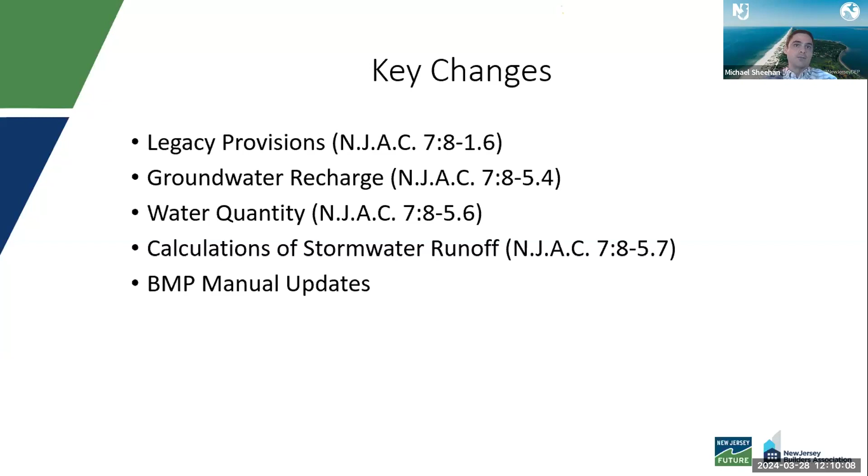Some of the key changes are listed here. We have the legacy provisions, how projects will be subject to one rule set or another. From the stormwater management end, we have the groundwater recharge standards, water quantity, and how we calculate stormwater runoff. And all of those changes required us to make some updates to our BMP manual. So next slide, please.

So going through them, the legacy provisions is really the best place to start because you need to know what rule set you're going to be subject to. So all major developments are subject to the new rules, except in certain circumstances. If no permits were required from NJDEP and an application was required by ordinance to, say, a municipality or a county review agency, and that application was submitted prior to the adoption of the rules, it would be legacied, as we call it now.

Or if you made an application to the NJDEP and it was technically complete prior to the adoption of the rules, you would then be legacied, provided that application had a stormwater management review component. We do have something like the Freshwater Wetlands Protection Act rules, which under general permits, we only look at stormwater if the major development thresholds are triggered within the regulated areas. So we had to make that distinction.

It's important to note that we kind of have two tiers of legacy. If the application was made between March 2nd of 2021, which was the effective date of the green infrastructure rules, and July 16th of 2023, you would then be subject to the green infrastructure rules. And if it was made prior to March 2nd, 2021, you would then be subject to what we refer to as the old stormwater rules prior to the green infrastructure revisions.

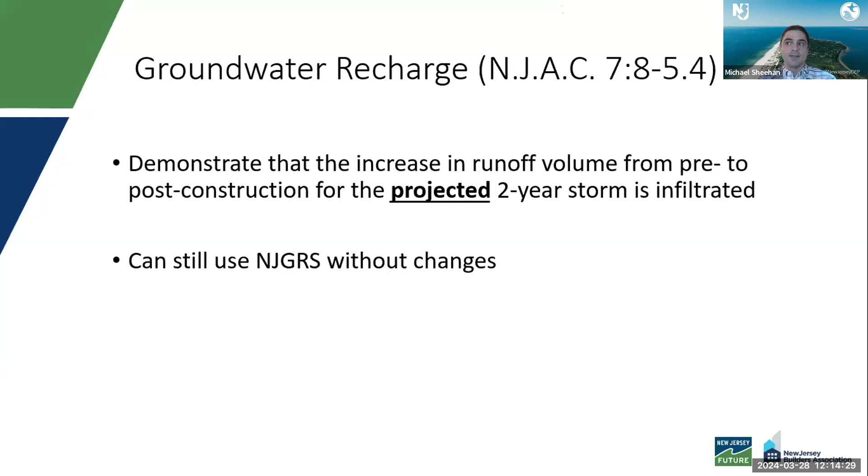Moving on to groundwater recharge, not too much has changed. Instead of demonstrating that the increase in runoff volume from pre to post construction for the 2-year storm is infiltrated, we're now looking at the projected 2-year storm. And we'll talk a little bit about what this projected 2-year storm looks like. But otherwise, the vast majority of projects that we see use the New Jersey groundwater recharge spreadsheet, and that can still be used without any changes. Next slide, please.

Water quantity is where the biggest change occurred, at least practically. In terms of rule text, not much has changed. Water quantity reductions must be met now for a total of 6 rainfall conditions. So you're going to have your current and projected 2, 10, and 100-year rainfall events. So it's important to note that the quantity standards aren't changing, just which events we're looking at.

So the quantity standards are matching or reducing proposed hydrographs compared to existing, demonstrating that there's no increase in runoff rate, and that the increase in runoff volume or change in timing doesn't make flooding worse. Or what we see most often is your peak rate reductions of 50, 75, and 80% for the 2, 10, and 100-year events.

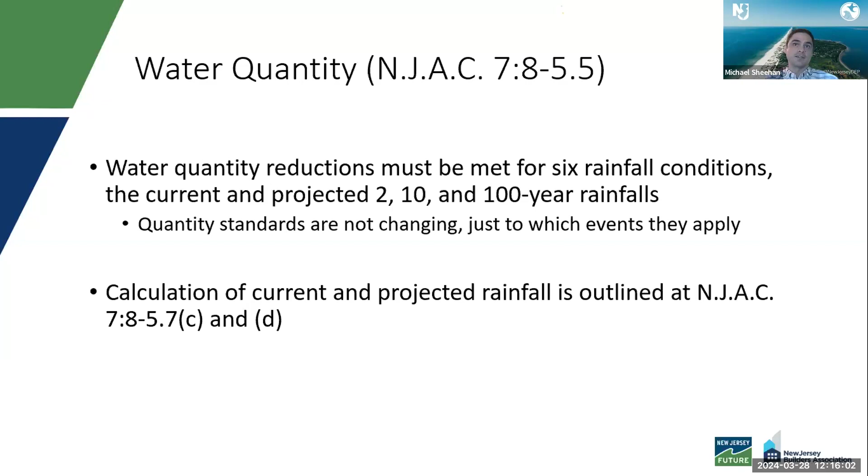Again, instead of looking at just a 2, 10, and 100-year event as we know them now, there are a current and projected 2, 10, and 100-year event. So that's 6 sets of storms. How to calculate these is outlined at N.J.A.C. 7:8-5.7(c) and (d). C addresses the current rainfall, and D addresses the projected rainfall. So next slide, please.

And so what that looks like is this. First and foremost, we now require the use of NOAA Atlas 14 rainfall data. And then you would take that NOAA Atlas 14 rainfall data and multiply it by an adjustment factor for each county and for each storm event. Essentially, NOAA Atlas 14 was based on data from 1999.

And we had some studies done through Cornell and the Northeast Regional Climate Center that looked at the increase in rainfall depth from NOAA Atlas 14 compared to what we're seeing today. And then we undertook another study which evaluated what that looks like projected out to different design horizons. So what we came up with were these two tables of adjustment factors based on counties. The projected rainfall adjustment factors are based on RCP 4.5 and the 83rd percentile with a design horizon of 2050 to 2099, so up into 2100.

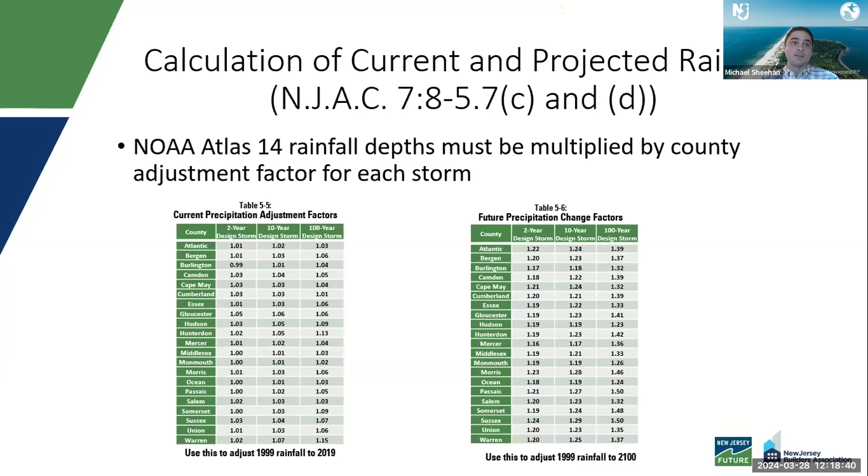So next slide, please. So this is a little preview of what's to come a little bit later from some of the other speakers. But when considering this, we looked at how this would impact stormwater design. So we took a forested, undeveloped site up in Sussex County, which had the highest projected 100-year rainfall increase. And we decided to see what projecting the NOAA Atlas 14 data to the current conditions and to the future conditions would look like. So next slide, please.

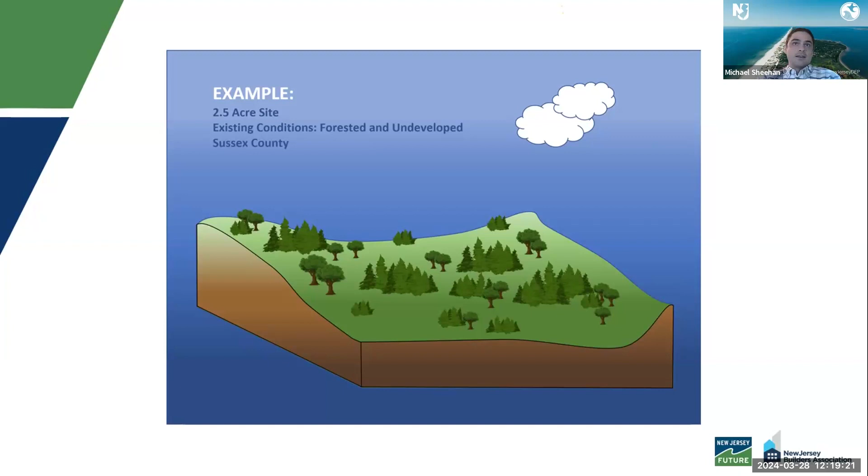So if we took that entire site and built it out, what would stormwater features look like? So we came up with this table, and there's a lot of ways to design a basin. So we had some assumptions that we made, and really what we looked at was how much of your land area would you have to dedicate to a stormwater management feature. So at about 2.5 acre drainage area, which is the maximum size for small scale green infrastructure BMPs, based on NOAA Atlas 14 data, it's anywhere from 8 to 11% of your site being dedicated to stormwater management. And what we saw is projecting it to current conditions, not as much, and projecting it beyond that a little bit more. It's important to note the units here. This is percentages of your site.

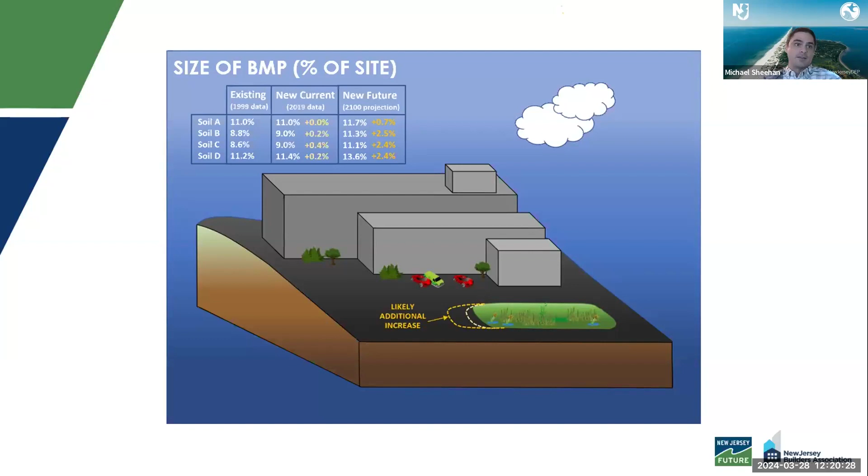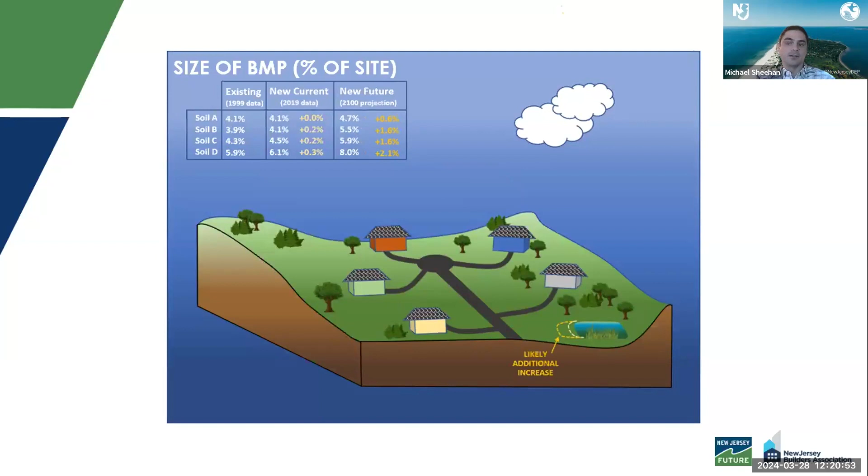So if you go to the next slide, we also looked at a residential subdivision, what that would look like, and similar sorts of things, small increases of the percentage of your site being dedicated to stormwater management facilities. But they are significant increases. This is going anywhere from about a 5% increase up to about a 40% increase in basin footprint. So it's not insignificant, but not too terrible, at least in our opinion.

Some of the other things, and probably one of the most important things I think that we adopted, was the calculations of stormwater runoff and removing the rational and modified rational method. They oversimplify a complex process. There's a lot of conflicting guidance on what the appropriate values to use are, but we no longer allow the use of rational and modified rational methods to meet your quantity, recharge, or quality obligations. Storm sewer piping is a little bit outside of the scope of the stormwater management rules, and we don't place any restrictions on using the rational method for sizing of conveyance piping. It's typically done with the local soil conservation district.

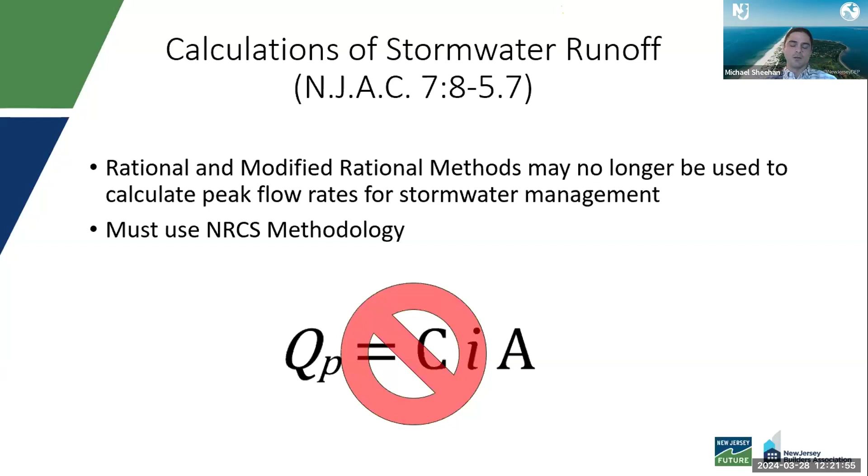Next slide, please. So with that, a couple updates to the BMP manual. Chapter 5, obviously the calculation of stormwater runoff had to be adjusted because we have these new storm events, and we're removing the rational method. Chapter 6, the groundwater recharge, just minor revisions to reflect the new standard, but Chapter 6 really is detailed about the groundwater recharge spreadsheet, so not much there. And chapters 9.5 and 11.3, which are your MTD designs, those were adjusted to be consistent with time of concentration requirements that are addressed under Chapter 5. And lastly, we did put model municipal stormwater control ordinances in Appendix D to reflect these new rules.

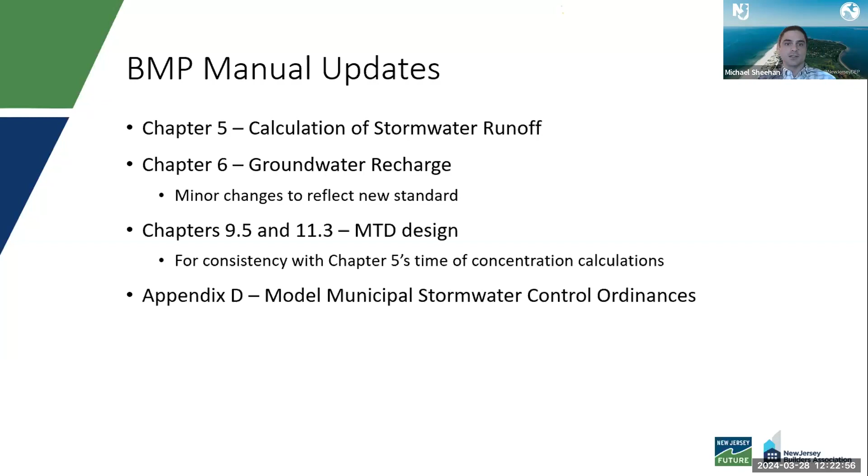So just a quick run through on some of the major updates to Chapter 5, the calculation. Next slide, please. One is the rainfall distribution map. Most of the time we see people using the rainfall distribution map that's delineated by county. And that was put out, I believe, by the New Jersey Department of Agriculture. We say not to use it. NRCS did publish this new map, which shows New Jersey. It's similar to the county delineation, just a little bit different.

And really all this distribution, and which rainfall distribution, whether it's NRCS type C or NRCS type D, is based on just a ratio of your Atlas 14 rainfall depth during your 25-year storm. So the ratio of your 60-minute to your 24-hour storm during the 25-year event. We don't have any GIS of this shape available yet. We are working on it. We have proof of concept, but we haven't gotten the okay to publish it. So hopefully that'll be forthcoming.

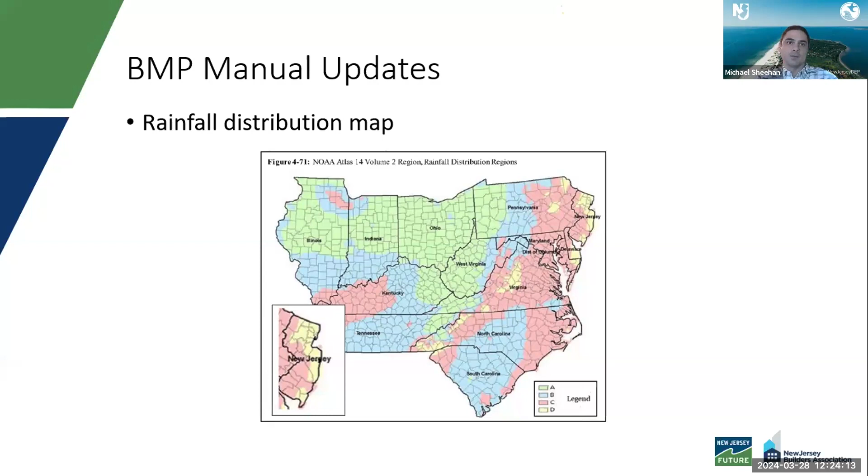The county map is a good place to start. And if there's any sort of question where you fall in, we encourage you to contact us and we can talk it through. Next slide, please.

I think one of the bigger changes is the use of the current and projected 2-year rainfall depths for your sheet flow travel time calculations. An increase in rainfall depth is inversely proportional to your travel time, based on Manning's kinematic equation here. So an increase in rainfall depth is going to decrease travel time, and therefore we're shortening the sheet flow and the time that sheet flow is taking. Did I make sure I said that right?

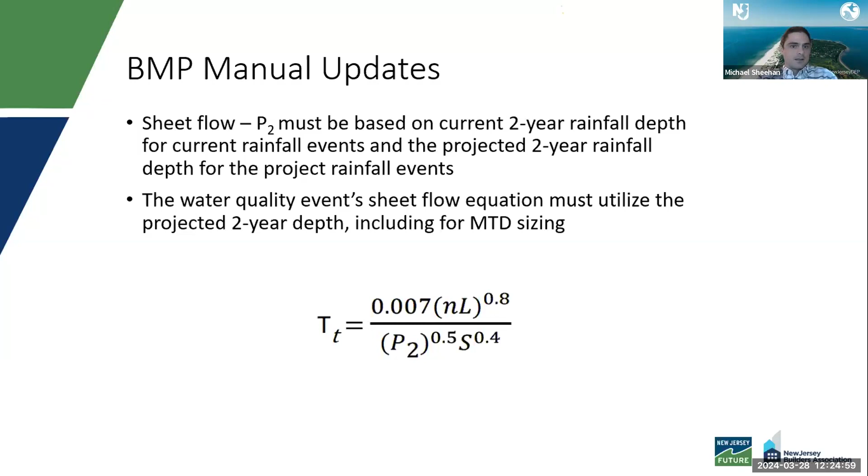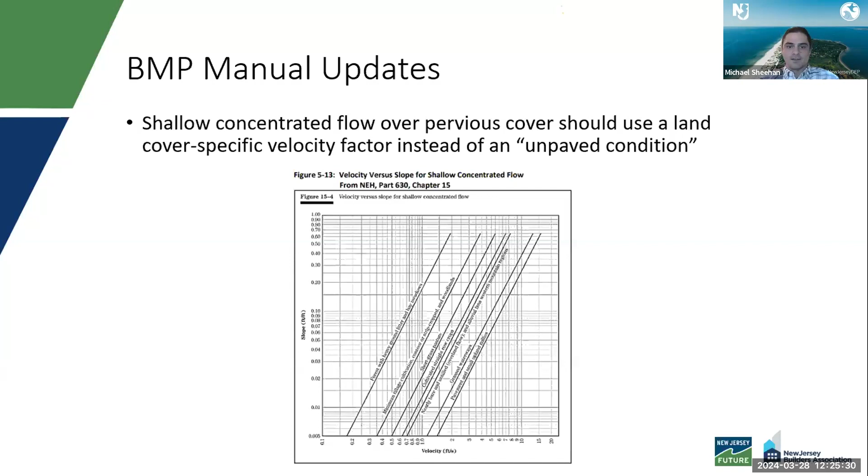Yeah. And it's important to note that you have to use the projected storms for the water quality event. This one isn't really an update, but it's something I like to bring up whenever I can. It's just using a shallow concentrated flow equation specific to your pervious land cover. Historically, we see paved versus unpaved, which would fall on the right side of this graph. NRCS says use the land cover specific pervious equation. All this is outlined in Chapter 15 of the National Engineering Handbook.

And finally, we just have some useful links here. It can all be found at dep.nj.gov/stormwater. The BMP manual is there, and there is a previously recorded training that we did. You can see in the image below, you hover your mouse over training and drop down to the Stormwater Management Design Review course. All the way at the bottom of that page gives you a good overview of the inland flood protection rules. And with that, that's all I have.

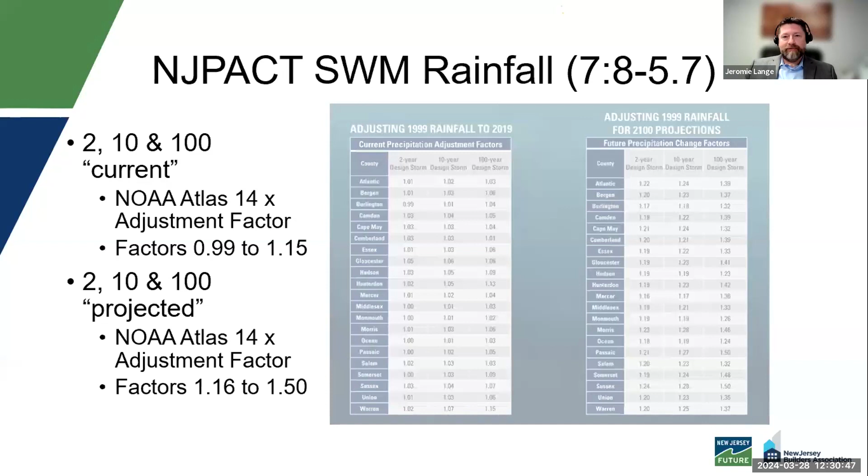So to illustrate how significant, French & Parrello was kind enough to run a 1-acre theoretical site for me just to get some sensitivity of what this looks like in real life. So they ran an acre in 4 different scenarios: a wooded scenario in an A soil, another acre with pervious soils but not necessarily wooded, D soils for pervious land cover, and then impervious. And what they did is they calculated the runoff rates and the volumes for all those scenarios, and then developed some ratios, which are written on the right side.

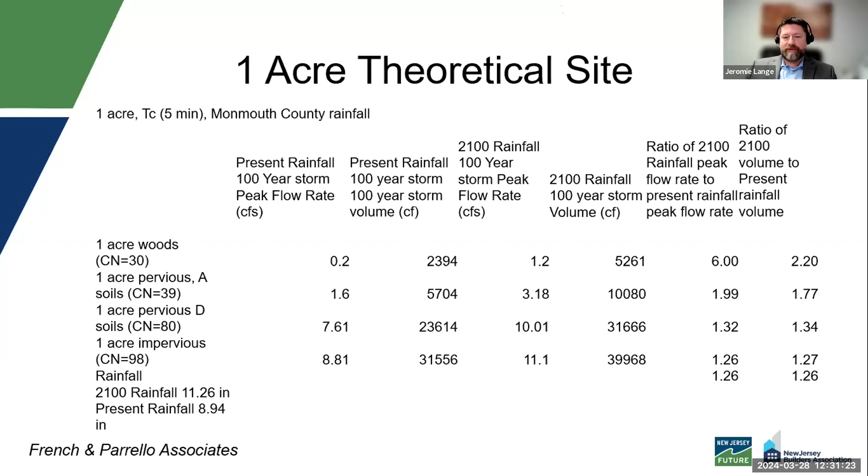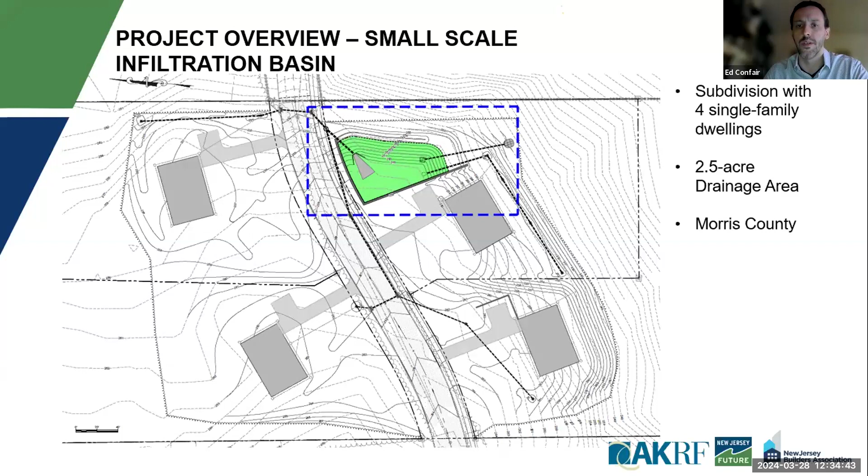So next slide. This first site, we're in Morris County, 2.5 acre drainage area. It's just a 4-lot subdivision, single family homes, pretty simple, straightforward scope. So we've got one small scale infiltration basin in the corner of the lot. So maybe not too different from what you would see, maybe even pre all these rules. Small enough site that everything's coming to one location.

So this is unfactored data. We're meeting in all 3 examples too. We were trying to meet the 50, 75, 80% reduction thresholds. That was the method of quantity control that we used. So won't read every line here, but we'll have some comparison tables as we go through the slides to highlight the differences. All right, so this was the base design, approved design, got all its local state approvals. So next.

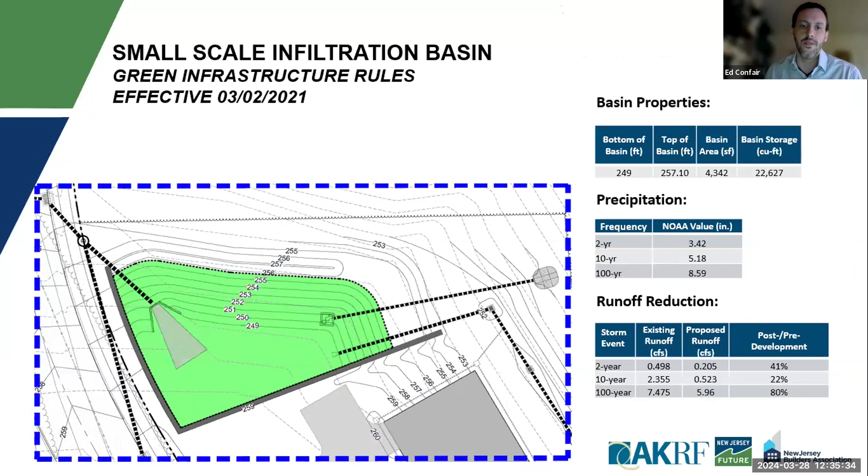So if we were to design this present day with the factored rainfall data, what you see in the blue would be the increase to the basin. So if you look at the table in the upper right, we need about an extra foot of storage depth in the basin. We'd see a little over a 20% increase in the footprint. You'll notice adjacent to it, it's being held by a retaining wall on one side, so that would have to grow a little bit. We didn't update all the grading on these graphics as well. We're really just trying to show comparative, like order of magnitude footprint and depth increases.

And the overall storage of the basin would need to increase by about 60% in order to hold all the way up to the factored 100-year rainfall data. So in the precipitation values, you can see some of those increases. So this is just present day, the NOAA data, and just the 100-year factor data. We skipped the in between 2019. I think this illustrates the point. So pretty big jumps, especially in the 100-year. But in order to still meet the 50, 75, 80% reductions, which this would do, that's about what we're looking at.

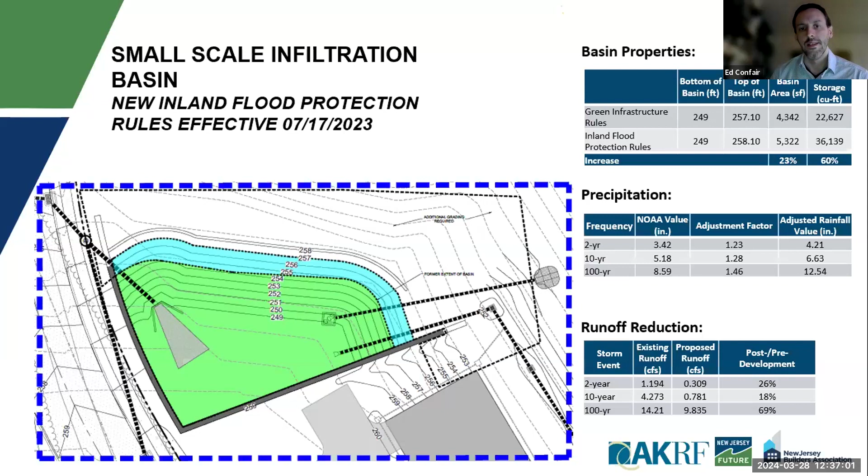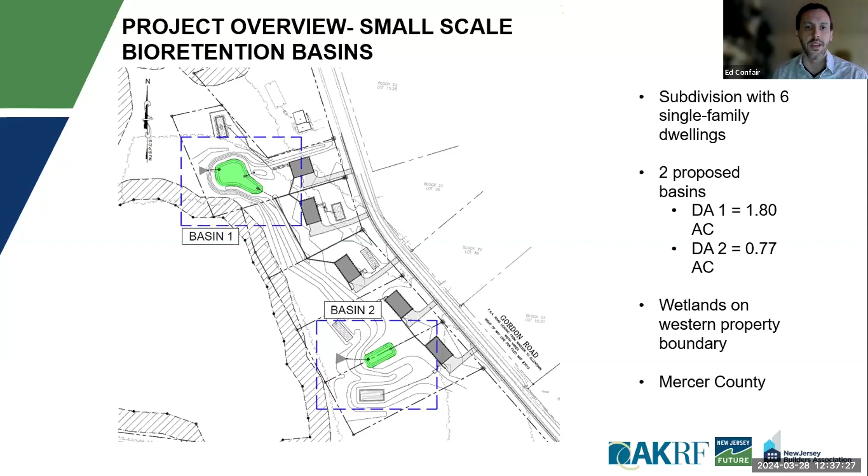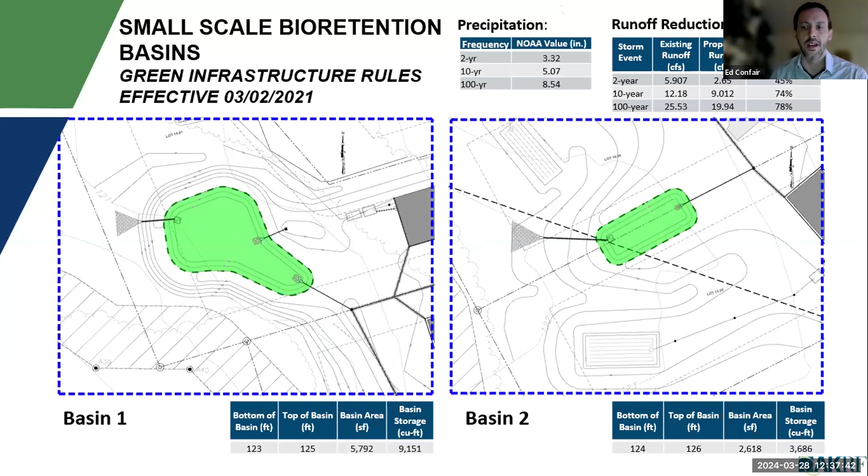Next slide. All right, so this is a little more spread out. Still single family example, but we've got two separate small scale basins here. Also working around on-site septics on this. We're up against a wetland buffer as well. But so this was a fully designed, approved subdivision under the 2021 rules. So next. So just the approved design, 2021 rules. Again, we're using the 50, 75, 80% reduction criteria. Next.

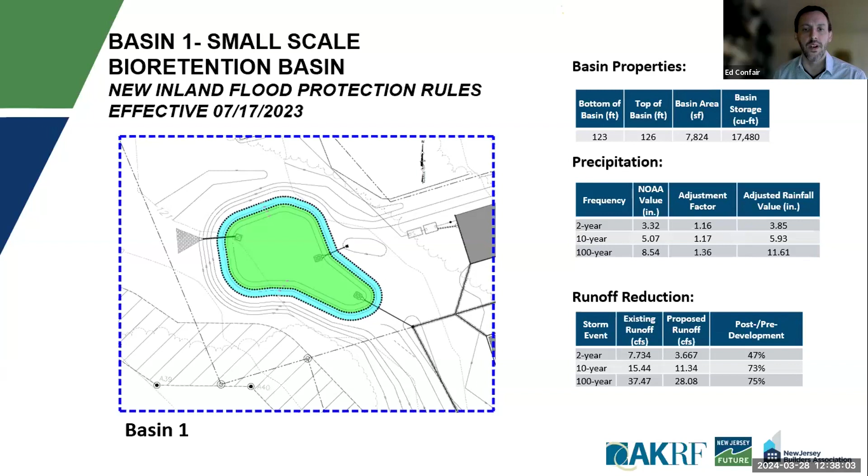So the larger of the two basins, again, the blue shows the footprint. Similarly to the last one, we gained about a foot in depth and over 30% increases in footprint and storage volume. Next slide. Similar in the second one. I'll jump to the next one, has them side by side.

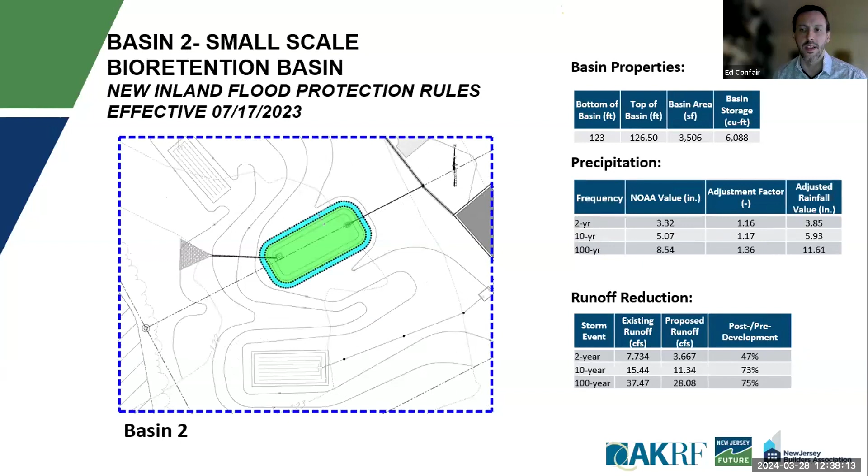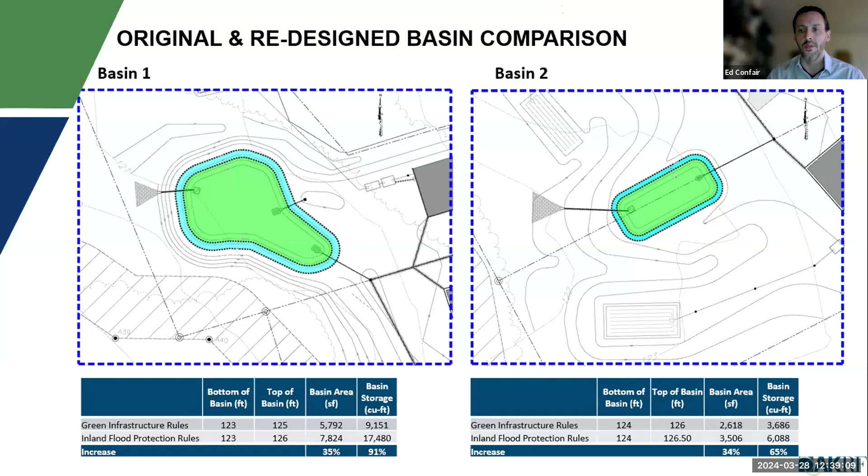And especially in this one, we're not losing any buildable area. There's kind of plenty of room to work these in. But so in both cases, we're gaining about a foot in storage depth, and the increases shown in footprint and overall volume size. Let's go to the next one.

All right, so the third one I think is the most interesting. So this is a denser project. We've got 3 different townhome buildings and an apartment building. We're right up against some tight boundaries. We've got wetlands to the south, plan bottom of this image.

And we've got 3 different styles of BMPs here. So we've got an infiltration chamber system, which we really had no other choice but to locate under the entry drive into the complex. We've got 2 pervious pavement parking areas, which are the bottom center rectangles that you see. And then we had a traditional small scale infiltration basin in the lower right of the project.

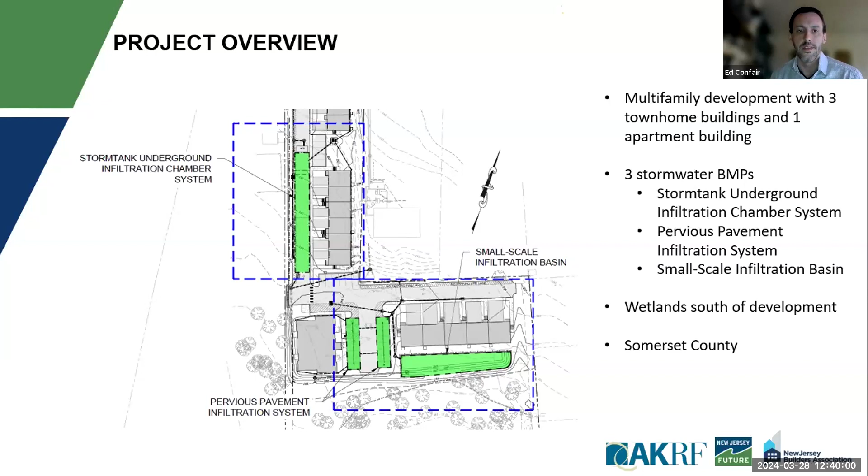So next, the first one, the MTD. The other one I want to point out on this one that was a little unique is the timing of this one. We weren't sure if we were going to be able to get it done before the inland flood protection rules would go into effect. And so the client we worked with on this one made the decision to design it assuming worst case scenario that it might need to comply with those rules.

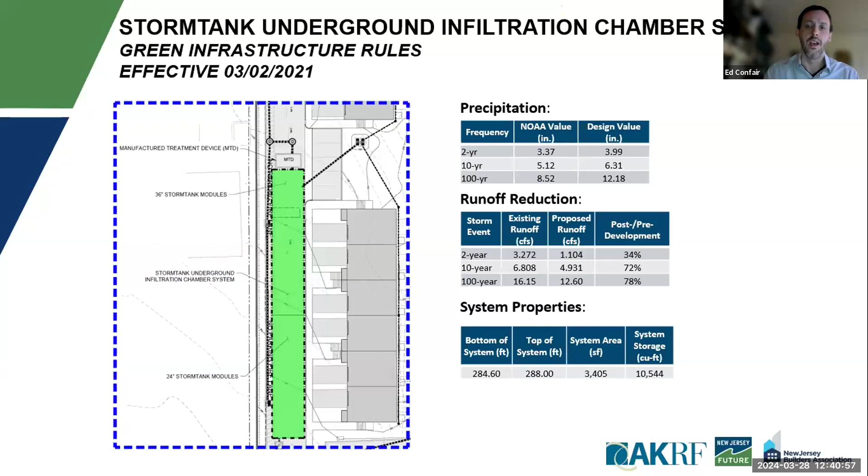So you'll see here in that first table, the NOAA values, we did go over them. This, at the time that I think we started looking at it, was our assumptions on what the factored data would be. It doesn't quite match what is currently in the rule, so you'll see that reflected on the next slide. So this one's starting point is already a little ahead in kind of assuming worst case scenario. So you're going to see some smaller deltas, but even with us trying to project forward, you can see here it was still a little undersized for where the rules have landed. But again, not anything that we couldn't accommodate.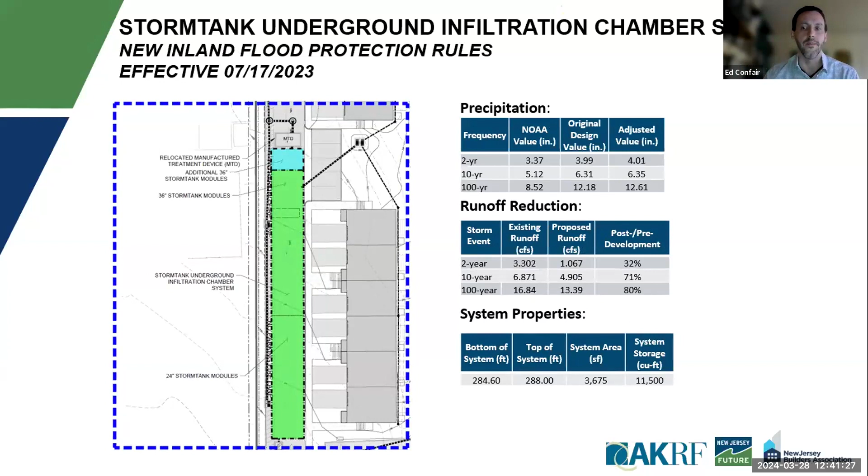So here, footprints increasing, but otherwise we're maintaining all our depths. We're locked in kind of at the bottom of this system with groundwater, and really grading on a site as tight as this, we couldn't make the road much higher, so it's just expanding laterally. Next slide. At the bottom, these are the permeable pavement and the small scale basin. Next.

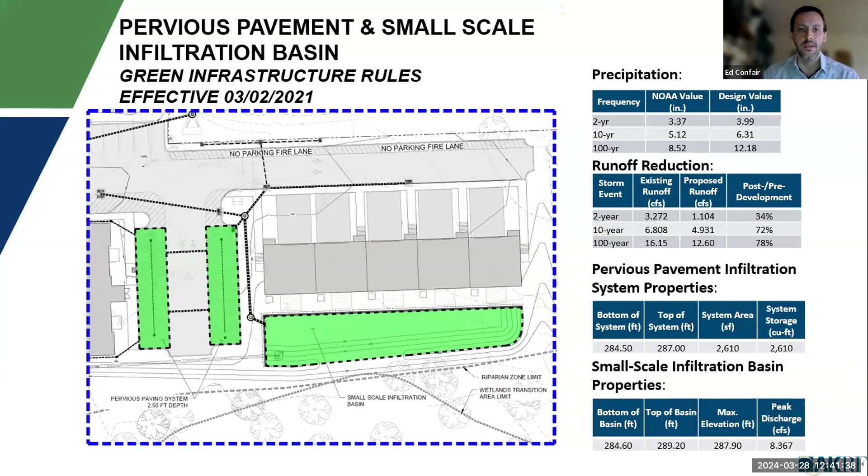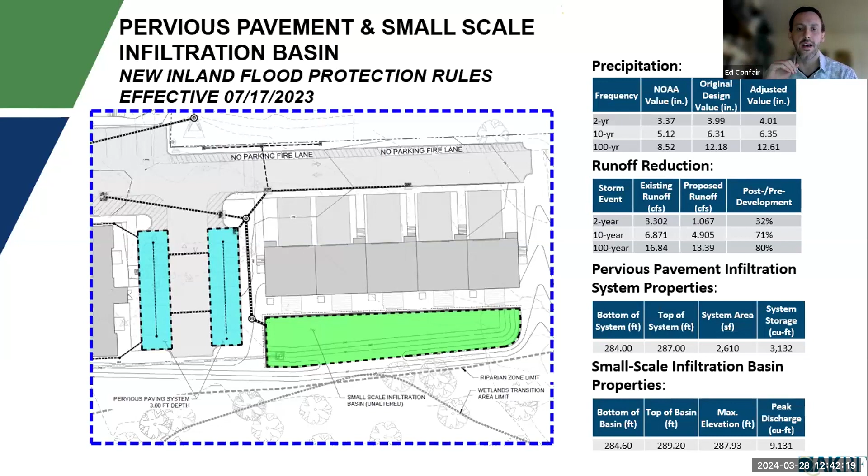So similarly here, we're kind of locked in with our footprint of the permeable pavement lots. Here we would have enough room, given our separation from groundwater, to make these a little deeper. So here there's no footprint change. It's a depth change of an additional 6 inches. And the small scale basin was actually sized enough that it wouldn't need to change. You can see in the table there's some minor increase in volume and height, but we actually wouldn't need to make it any deeper or wider. And there's a minor increase in the peak discharge from it, but nothing that affects the percent reductions that we were trying to achieve.

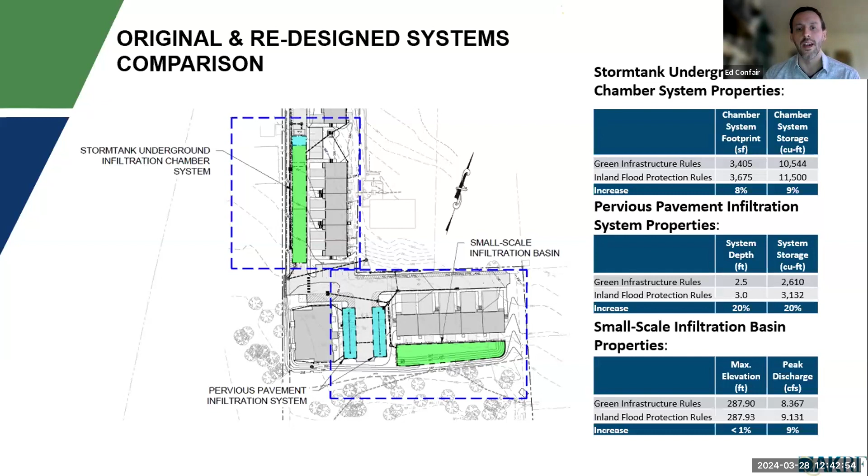Yeah, so here's the summary. Modest, just under 10% increase in the chamber system, 20% increase in the depth of the permeable pavement storage, and very minor, like 1% increase in the small scale infiltration basin. So it's proof of concept that the large storm events are still workable on a tight site that's a little bit higher density. And I'll pitch it back to Jeromie here.

Some other things to think about. A lot of times to get water in the basin, we're relying on storm sewer conveyance. But now we've got to think about, well, what's the design storm? Often it's a 25-year design storm. And when you run the hydraulic grade line, a lot of times you can get the 100-year in it. It might be flooded, it might be almost up to the grates, but it'll go through there. That's probably not going to be true for the year 2100 100-year. It's going to overwhelm that storm sewer system. So flow paths might be different. So you've got to make sure when you're designing a BMP that the water can actually get there, even if it's taking an overland flow path. So that's a really important consideration.

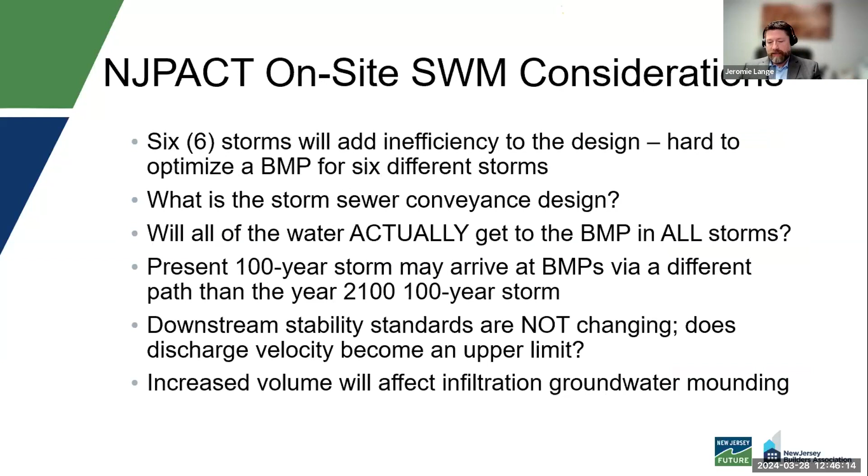So in terms of offsite characteristics, right now, as I just mentioned, proposed infrastructure is usually not designed for these types of storms, and that's even more true in existing infrastructure. Most existing infrastructure isn't even designed for the current 25-year storm, much less future 100-year storms. So you have to think about, where is water going to flow? Might there be unexpected flow paths?

An illustration of that might be if you had maybe a shopping center that's got a driveway out into a highway. That driveway might have a high point that's maybe 6 inches above the gutter. And maybe for today's storms, that's enough to keep the water in the highway. It doesn't come on site and head to your BMP. However, in the year 2100 storm, that gutter flow might overwhelm that high point, and now you're actually starting to take water from that highway system into your BMP, which would obviously then dramatically change the design of your stormwater system.

So these are things that you really have to think about, whether it's some kind of overtopping, or if it's a volume-based system. If you're discharging into something that maybe doesn't have overland relief and relies on a storm sewer system or some other means to drain that's limited, volume might really matter. And you saw before in those ratios, in certain situations in particular, that volume is a dramatic increase, and that may change the behavior of either areas upstream of the site or downstream of the site.

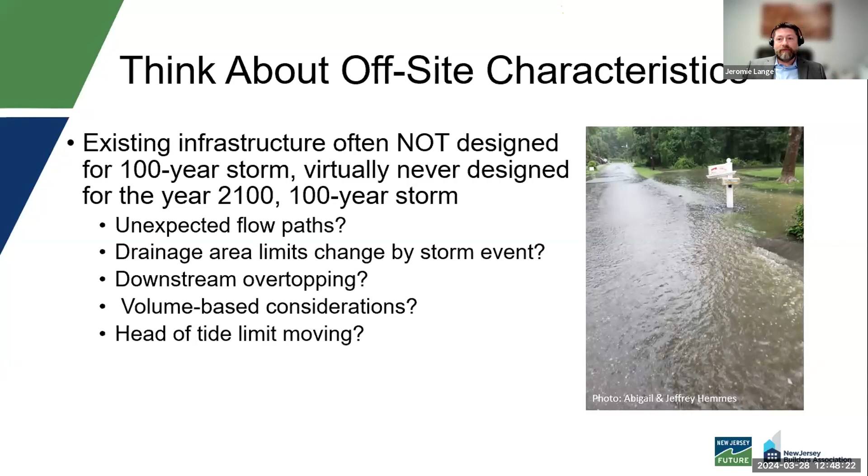And then finally, it might actually impact head of tide, because the fluvial event now, when you run the flood hazard calculations, is going to be much larger. Now that might actually be swinging back the other way when PACT 2.0 comes out, because the tidal flood elevations are also changing dramatically. But for the moment, this could have an impact on where your fluvial versus tidal is the controlling storm.

So this difference is very important and more exacerbated in the year 2100 storm. So you've really got to think about these downstream conditions. What are they going to look like in this storm event? Because it could be several feet of tailwater difference, which may then affect your BMP's ability to function properly or as designed in those storms. And it's the same with the sister changes in the flood hazard portion of the rules under the inland flood protection rules, that you're now looking at a flood hazard that's based on those larger events, which again is going to increase that tailwater elevation.

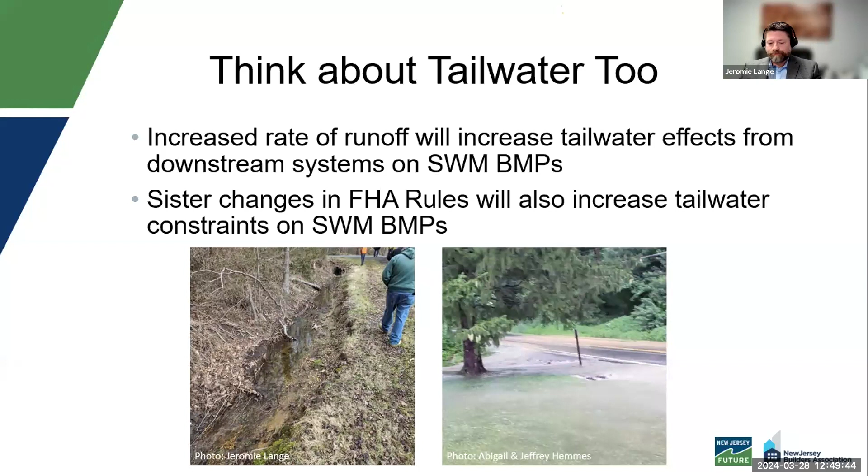So geotechnical becomes even more important than ever. It was always important. It's far more important now, particularly in minimizing the cost impact, right? In many cases, you can make the model work. You just keep bringing in fill, you keep adding more BMPs, and you can make it work, but it may not work from a cost perspective.

And again, being both an engineer and director of development for a developer, I kind of see both sides. So it's important to get the right geotech information so you can optimize that design and you can get results similar to what Ed showed you before, where you can minimize those impacts on the design, which of course translate directly to cost.

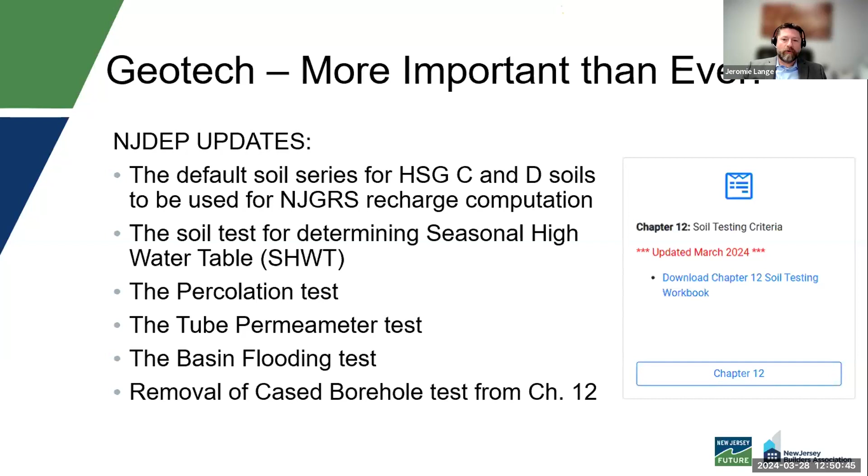So continuing on geotech, the approach I found that works the best is to do it in 2 stages. So do an initial site-wide coverage stage, get an idea of where the groundwater elevation is, what kind of soils you have. And then as you develop your stormwater design, you can go back and get your final compliance coverage. So in other words, make sure every BMP's got the appropriate amount of testing, whether that's test pits or borings and hydraulic conductivity testing, seasonal high water table establishment, looking at restrictive horizons.

By just planning ahead to do it as a 2-stage thing where it's built into your schedule, it's built into your cost model, you're going to get a much more efficient construction design on the back end. So even though there's a little bit more cost to go out twice, you will save multiples of that, orders of magnitude of that in actual construction.

Speaking of which, doing a boring with continuous sampling will save a ton of money. If you're doing a project that's any larger than a Wawa, it is well worth the cost of doing a continuous sample boring. The reason for that is the most important factor, by far, in the Hantush model for groundwater mounding is the initial thickness of the saturated zone.

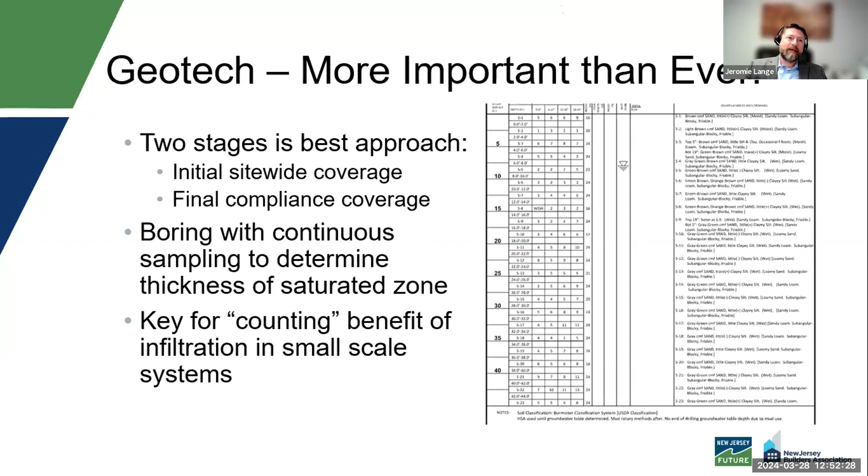The continuous sampling boring allows you to exceed what the DEP allows you to assume without testing, which is only 10 feet. You can get that to be multiples thicker, which has a huge impact on groundwater mounding and a direct impact on the cost. It's really the key for counting the benefit of infiltration in your small scale systems. Next slide.

All right, so as most of you probably know, there are many areas of the state that have poor soils where infiltration is not as easy to do. These might be soils mapped as hydrologic soil group D soils. There might be areas that have conductivity testing somewhere between 0.2 and 1 inch per hour. So it's not quite enough to be a D soil, or at least not mapped that way, but it's enough to be very difficult to design in.

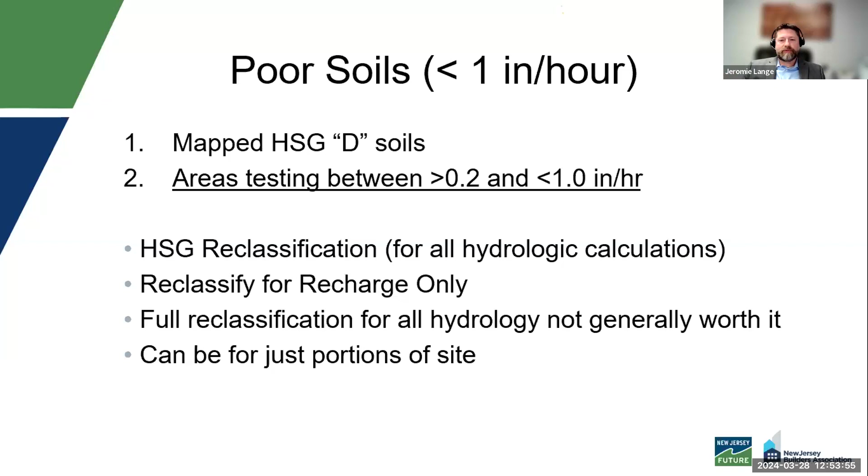And you can do it for just portions of the site. So it doesn't have to be site-wide. You can spot do it. If you've just got one area of the site that is problematic, you can go ahead and do the necessary geotechnical work to reclassify that. So what might that look like? This next slide gives you a visual of a site that my company has worked on.

And you can see we had a wide variety of things going on here with different types of soils, some of which we just took the way the web soil survey has. Others we actually went through the effort of reclassifying. And this took a little bit of time to do, but the net result of the final stormwater design was much more efficient than what we would have wound up with. We would have lost, frankly, yield on this.

We would have needed more areas for BMPs to meet what was really a false positive on the amount of recharge. So by going through the reclassification, we were able to right size the recharge to be consistent with what's actually occurring on the site in real life. So even though it took a little bit more engineering and geotech effort, the yield and the construction costs on the back end, again, justify that by multiples.

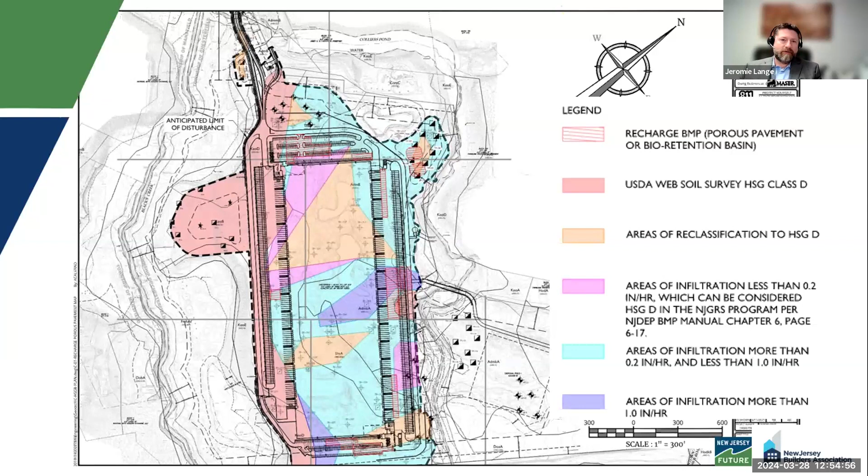So in terms of modeling of poor soils, when you're doing it for recharge only, you basically need to show one of these criteria: that the soil is testing less than 0.2 inches per hour, the depth of the restrictive horizon is less than 20 inches, and/or the depth of the seasonal high water table is less than 24 inches. When you can show any one of those, then you can treat it as a D soil in the recharge spreadsheet. And again, this can be just for portions of the site.

This information is not that difficult to get. It does take a little bit more because you have to define the limits of the area. So it does take a little bit more geotech. And that's again the beauty or the benefit of doing that two-stage geotech approach, because once you've kind of figured out how it's shaping up, you can go back and get the test pits in the right spot to delineate what is actually happening on the soil.

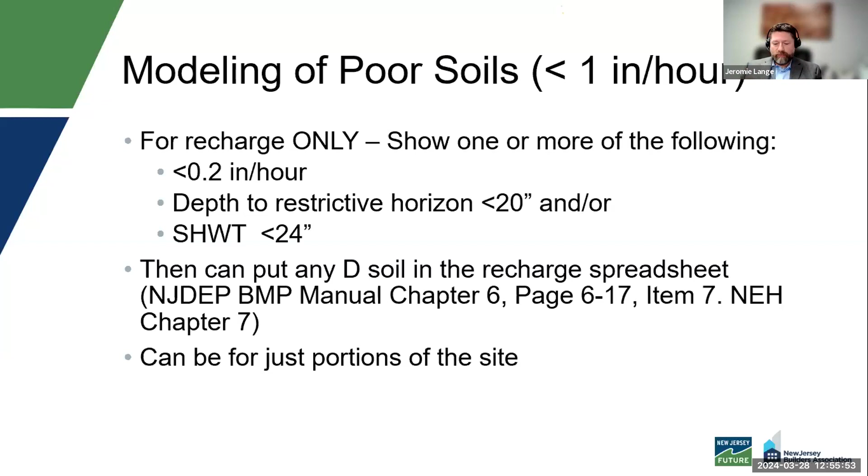From a design standpoint, what can you do to deal with poor soils? You can look at removing restrictive horizons. That can include soil replacement. Sometimes you have soils that are really bad, and you can do it all the way down to the seasonal high water table if you need to. If you just have an upper layer or some interim layer, you don't have to go down to the seasonal high water table. I will note you do have to test under the soil replacement if you're not extending it all the way down to the seasonal high water table. And that's again where that two-step approach for geotech will help you out, because then you can get that testing if that's the plan.

You can use things like underdrained porous pavement or small scale basins. Those are good strategies when you have poor soils or shallow groundwater table. You can also elevate infiltration and bioretention systems on the site. This is the benefit of a treatment train approach, which GI is really pushing you to. You can take water from upper areas of the site or from a roof area and take advantage of the elevation if the site is appropriate for that.

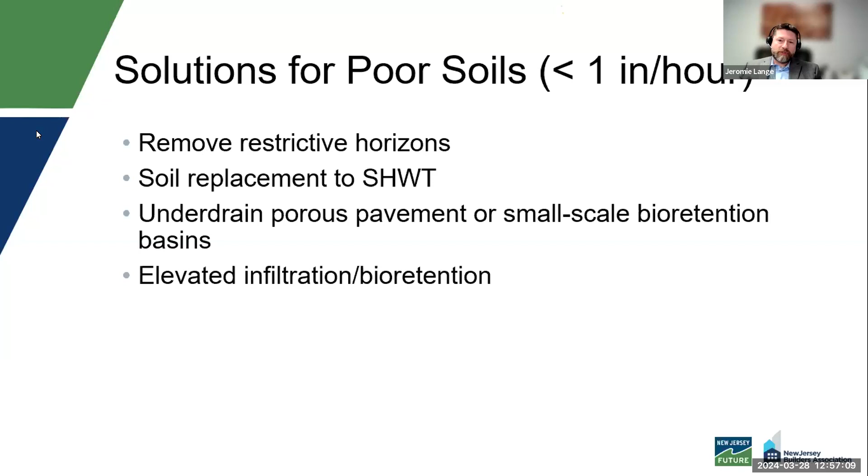Key part of the stormwater approach is using small GI. As you'll see on the next slide, small GI is less sensitive to groundwater mounding because it's just a smaller area. Groundwater mounding kind of peaks in the center of the system. So the smaller and the more linear a BMP is, the less the groundwater mounding is going to come up. This makes sense because, per square foot of surface area of the BMP, you've got a lot more cross-sectional area under it for that water to disperse out in all directions. So the more small GI you can use, the better.

You'll be able to count the infiltration, which is huge, and even more important with the additional volume coming with the projected storms. You'd be able to count that infiltration, and the groundwater mounding, which is kind of a limiting factor to that, will stay lower when you're in a small scale. Same is true for decentralized. When you put small scale BMPs together, their groundwater mounding interacts. When they're separate, decentralized, spread around the site, they won't interact like that.

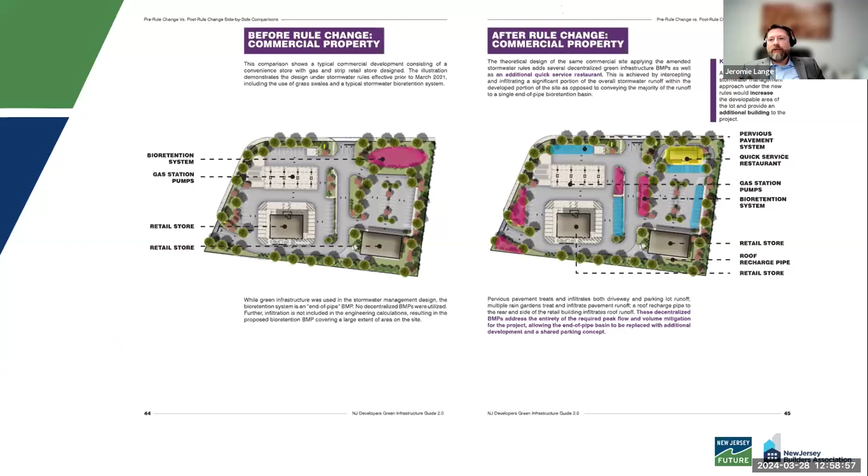On a final point here, almost a final point, the manual is very helpful. Even though it's not updated yet for the inland flood rules, it is fully updated, as indicated, on the green infrastructure. There's a lot of helpful tips and tricks on how to use or install BMPs throughout the site to take advantage of that.

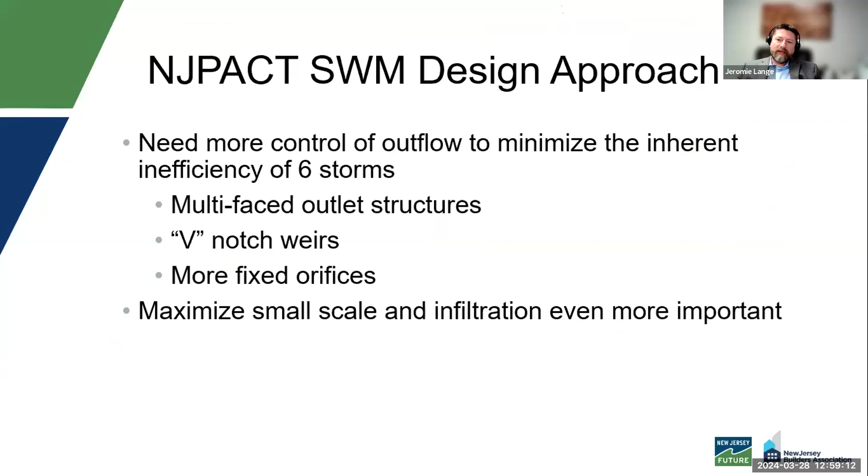From a technical aspect, kind of how does that look? You could do things like multi-face outlet structures, V notches, more fixed orifices to get those outlet structures really dialed in efficiently for the design.

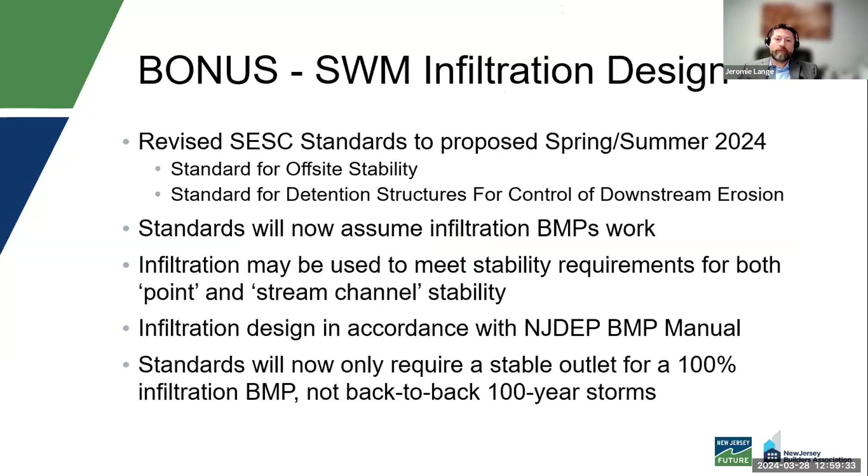And then a final thought here from a kind of a bonus standpoint, there is a significant change coming to the soil erosion regs where they are going to fully recognize infiltration. So that's a big deal. That should be coming out in the register this spring. Hopefully it will become effective maybe year end. So that's something to keep an eye out for.

All right, thanks, Jeromie. Before we move into extended Q&A, I'm going to give George Vallone the mic for a few minutes, who also serves as our co-chair of the Developers Green Infrastructure Task Force, to share his perspective on stormwater management. I'm sorry we're going a little over time, but I hope you all can stick around.

Thanks, Lindsay, and great presentation, everybody else ahead of me here. So just a real quick background on me. I started developing in Hoboken in 1980, buying brownstones for $25,000 and gut rehabbing them into condos. Ergo, the name, not too tricky, Hoboken Brownstone Company. We stayed in Hoboken for 25 years, then moved into Jersey City in 2005. We've been there since, and we're now working also in Bayonne on an opportunity zone development of a large apartment building on a brownfield site. And then my most recent efforts were to purchase some vacant malls. I'm working on one in Flemington right now and one in Voorhees.

So I've been involved in the Builders Association since I joined in 1983. I started the business in 1980. My banker convinced me to join the Builders Association in '83. I was chapter president in '86. I've chaired almost every committee there is. I'm a life director, and I was the president of the state association in 2016 and 2017. I had been a regular speaker at New Jersey Future's Redevelopment Conferences, which is the premier redevelopment conference in the state. It's always at the New Brunswick Hyatt.

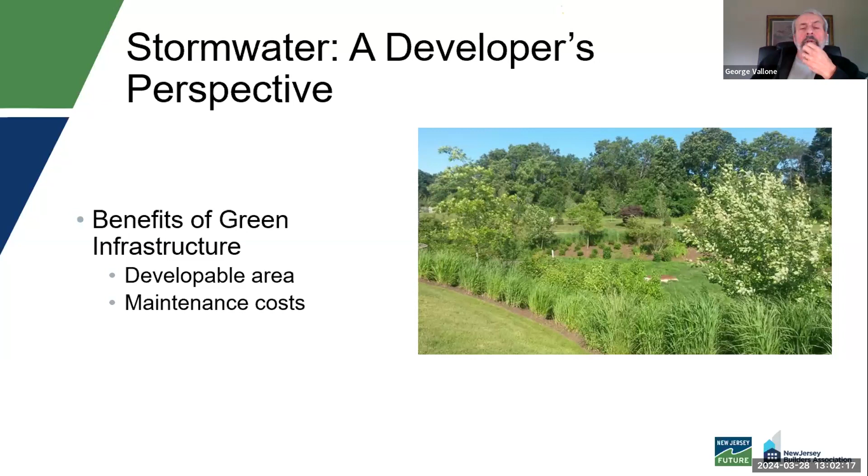My takeaways, and I'm going to try to go quickly here because I know it's much more important to get to the questions you guys are interested in, but I'll just speak real quickly about it. I have always tried to deal with my sites in an environmentally sensitive manner. Almost 100% of my work is on brownfield sites. So we're working on cleaning up contaminated, historically polluted sites and turning them into mostly mixed use projects with a heavy emphasis on the residential component.

I like the green infrastructure because it made me think that going to non-structural stormwater systems as opposed to relying on structural systems, one of the benefits was going to be it was going to cost less. And you were going to have a more attractive site because now, instead of building a bunch of structures that cost a lot of money and having to landscape the site, you can dedicate an additional amount of money from the decrease in structural costs and deploy those into the green infrastructure systems. So you end up with a very attractive site.

Maintenance is generally lower because it's landscape maintenance as opposed to basin and pipes maintenance, and in many instances, underground basins and pipes. So there's a cost savings there. I think it gives you a more attractive project. I also think it's the right way to build in an environmentally sensitive way. So that was one of the things.

The other thing is I have seen a lower cost of building the systems and maintaining the systems. The one thing I haven't seen yet in a strong way is the opportunity to get more density on the site. We had thought that having less structural systems would lead to increased density. Haven't seen that yet, but it certainly hasn't decreased density, which is good.

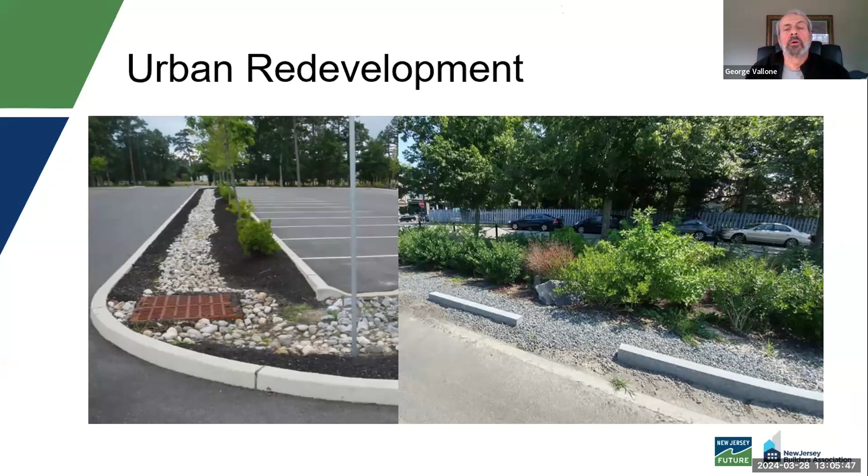There's some issues with dry access, which I think is part of this conversation. I was fortunate enough to listen to Commissioner LaTourette. The commissioner of DEP was a speaker at our builders conference last week. And I mentioned to him that we're having a lot of issues with dry access. And he said that he's heard that. He's had a lot of people applying for waivers. They don't have a process for waivers yet. It's kind of a one-off. Each project gets looked at individually, and he said he's decided to create a stakeholder group just to focus on dry access issues. I offered to join that. He took my card, and if I'm lucky, I may be involved in the stakeholder process. So we hope to see some relief on that front too.

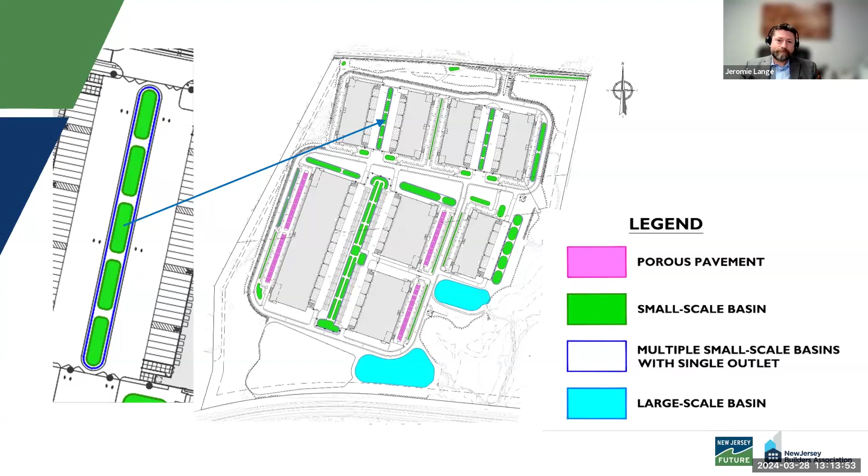Okay, great, thank you. There were a few questions about maintenance, like a general question about maintenance costs. And there was another question about reports of poor maintenance of infiltration-based structures, particularly infiltration basins with pervious pavement, causing flooding in adjacent roadways on private sites where HOAs or small retail property owners are the primary responsible parties for maintenance. So, if anyone wants to speak to costs and then some general best practices for proper inspection and maintenance techniques. I can give you a couple thoughts on that.

It starts with good design. A system needs to be resilient. So porous pavement, the pavement itself is really never the controlling factor. It's the soil at the bottom underneath the stone reservoir that is the limiting factor. Porous pavement itself has tremendous capacity. There's a system actually not far from my office that was installed in 2007. It's the earliest one that I personally designed that has been built. And I'm nearly certain it's never been jetted and vacuumed in its entire life. There are sections of it that are clogged, but the asphalt still outruns the underlying soil. So we're not getting a failure.

Now, can a porous pavement be overrun if your site is not stable, if there's a lot of lawn areas where the grass isn't well established and you're getting a constant flow of fines into the system? Yes, you can overwhelm it in that case. But that goes back to design. As far as other things, they are a little more expensive to maintain, but it's something that an educated landscaper should be able to handle. Again, if you're using the right soil mixes, things like that, it could definitely be done.